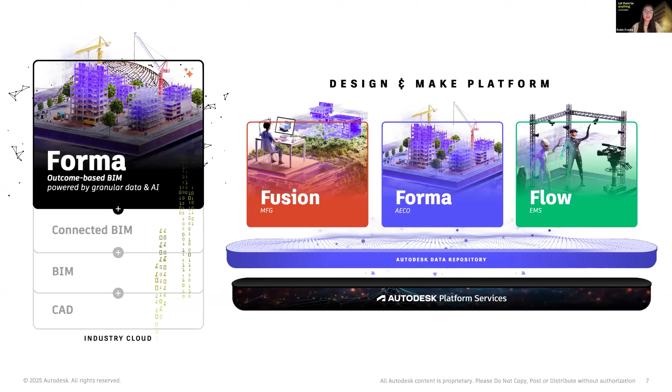So, as the poll showed, a lot of you haven't heard of Forma before or haven't used it. So let's just start with a little bit of background. So Forma is the AEC industry cloud for Autodesk. We have three industry clouds within the company, Forma, Fusion, and Flow. And Forma is the industry cloud for architecture, engineering, construction, and operations. And Forma is the first comprehensive industry cloud in the industry for architects, engineers, contractors, and owners.

It aims to unify BIM workflows across the project lifecycle and across different verticals as well. So it really is going to be a comprehensive industry cloud with one common data environment. So you'll be able to work across a project lifecycle in different stages and not have the need to do any rework. The data that you create in the beginning and the planning phase will be carried on all the way to operations with the Forma Industry Cloud, with new tools like Forma Site Design and Building Design built on top of the Industry Cloud.

And in the future, with the Industry Cloud capabilities, we'll be linking our hero desktop products like Revit with our connected clients to ensure that we're working on one common cohesive project environment with up-to-date data and one data source.

So just to talk a bit more about what this looks like, if we think about a project and its life cycle from planning to operations, we have multiple tools available at Autodesk to help support different parts of a project and its life cycle. The tool we're going to be focusing on today is Forma Site Design. And Forma Site Design is a cloud-based tool built on top of the industry cloud to support early stage planning and design for buildings. And that's what this meeting is about.

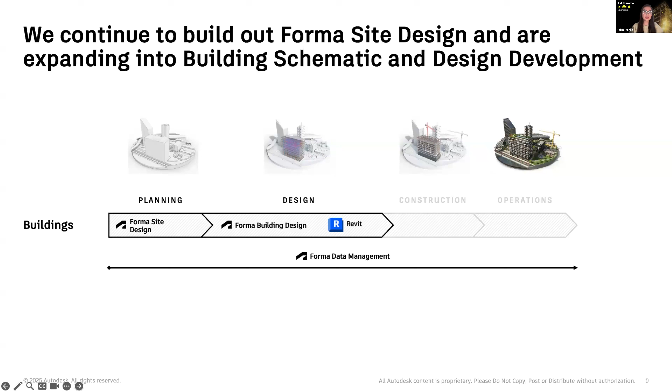All right, so more about site design. As we know, it's that tool in the early stages of a project that you would start a project with. What is site design? So site design is an early stage cloud-based analysis and conceptual design tool where you can do a lot of different things. So the beauty about site design is that because it's cloud-based, you don't need to have anything downloaded, right? So you can access it via Chrome and you can get started with a project in your location with just a couple of clicks.

So when you start a project for the first time, you're able to order contextual data that is available for the actual location of your project and get going on a site with data that's already geolocated and ready for you to start designing, which moves on to our 3D modeling capabilities. If you would like to, you can design natively in the Forma environment, both 2D and 3D assets that you can then run environmental analyses on.

So one of the main benefits of using site design as a tool for early stage planning and design for your massing studies is that you can run a suite of environmental analyses to help optimize and iterate based on outcomes that you are striving to achieve. So we have a variety of different analyses, sun hours, microclimate, wind, noise, embodied carbon, shadow, that are all native to the site design product that you can then run multiple times as you iterate on your massing options. And we'll see that more with HMC's presentation.

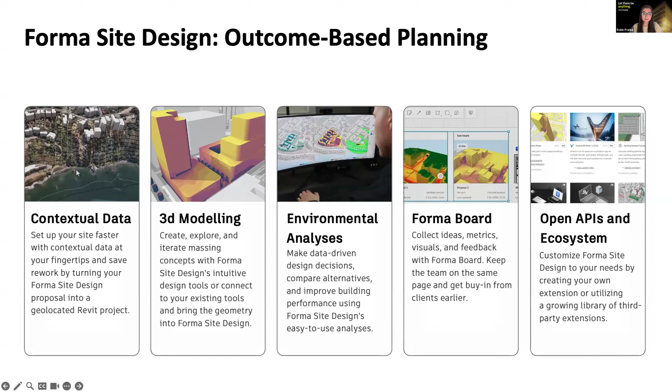All right, so here is a quick demo of site design, starting out with site creation. So going through the process of creating a project is very easy. All you do is enter the address of your site location. It's going to ask you to confirm the map area of your project. And once you click confirm, Forma will start to create a site for you. So it's generating the data for the site, including the terrain. And then it's going to ask if you want to order any contextual data for your site.

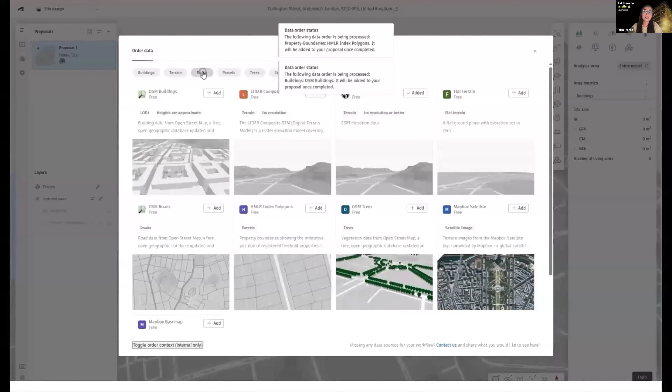And this is such an easy way to get started with a project. If you have no data available or don't know where to start, you're able to pull in existing conditions information directly into your site. So everything from buildings to property boundaries, to terrain, roads, trees, etc. You're able to order natively in Forma, and Forma will automatically georeference all of these contextual data sets for you and place them onto your terrain.

By the way, the terrain is also, of course, accurate for the area. And you are also able to toggle on and off your different data sets and choose some of these data sets, your contextual data, to make them your site limit. So here, if we wanted to take a property boundary that we ordered, we can select those and merge them to become our site limit for our project, which is wonderful.

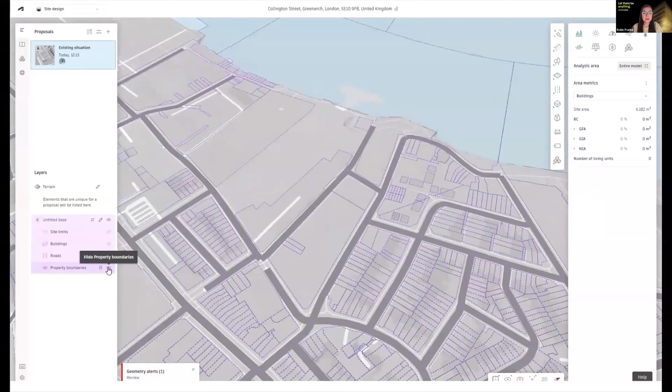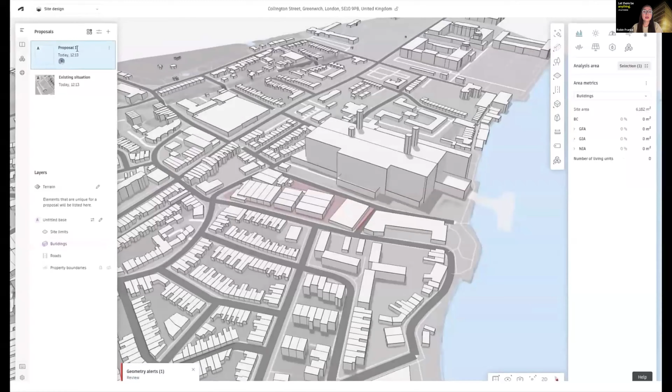So just in a couple of minutes, we're able to go from nothing to a pretty good starting base for our project. And this is especially great for pursuits, right? When you don't have a lot of time, but you want to have a good start of existing conditions to better understand the area of the proposed project. And see here, we've brought in the roads, we've brought in existing buildings, we've defined our site limit to go ahead and get started.

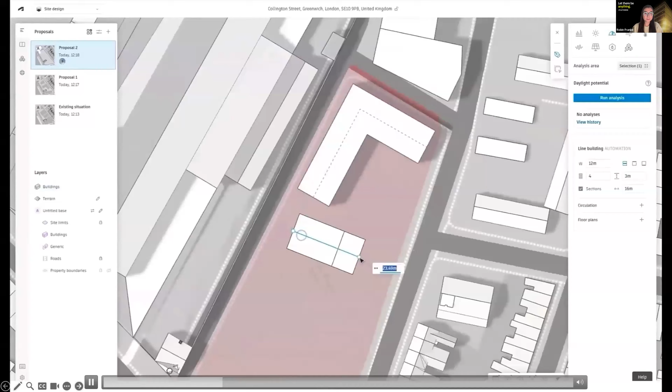So there's a series of tools that you can use within Forma to start designing. We have various building and massing tools that you can use that have different automations depending on the types of buildings that you would like to draw. This is our line building tool, so it will generate a building segment based on a line that you draw on your site. You can then choose to section it off, or do whatever you would like. It's a very easy way to start to generate area metrics based on proposed buildings just by drawing a line segment. So this is just one of the automations we have in drawing 3D for buildings to go ahead and get started and understand what's possible on your site.

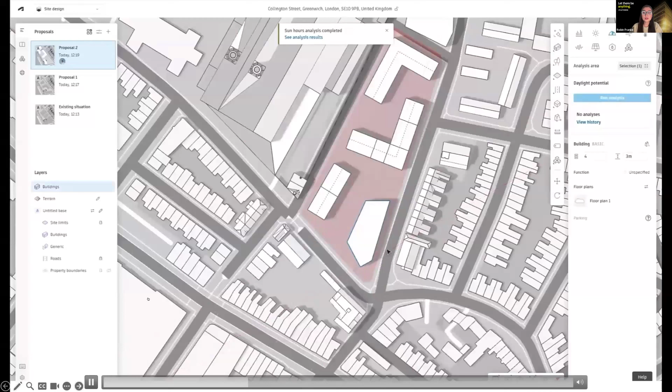We also have the ability to do some advanced drawing tools as well. So we have a basic building tool, which allows you to generate your own building footprint and extrude that by height. So that's another building automation. And for more advanced drawing tools, we have the ability to enter a mode called 3D Sketch. So this is showing 3D Sketch where we're taking our line building generator and applying advanced conceptual edits to it. So by adding a pitched roof to this building using 3D Sketch, we're able to get a little bit more detailed in our massings.

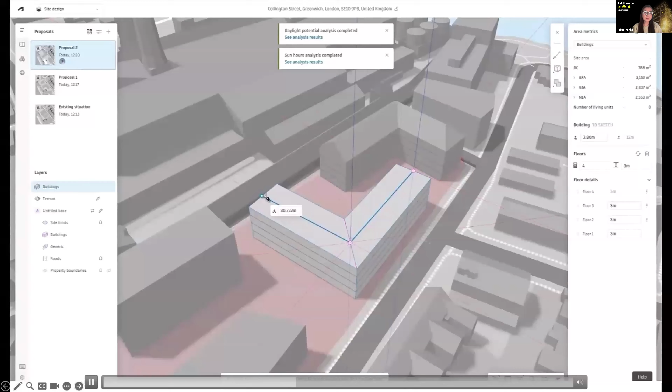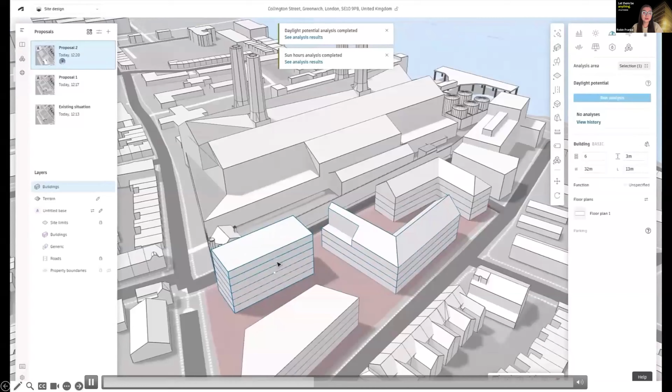So just to recap, we have a couple of different building tools in Forma depending on the level of detail you want to get into. If you just want to draw out massing options very quickly, massing blocks to understand potential area capacity, you can use a line building tool. We have a basic building tool for drawing out building footprints and extruding that by height. So those are both LOD1 options. And then we have a tool called 3D Sketch, which is what's shown here, to advance and further detail our masses to be a bit more conceptual as well. So depending on the level of detail you want to get into Forma, you're able to do so natively with our drawing tools.

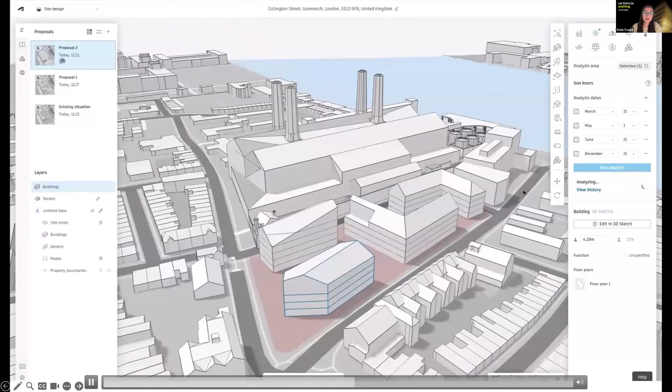All right, so notice how we've been running some analyses. On the right-hand panel are the analysis tools that are available natively within Forma. So we have a sun hours analysis that we've just run, daylight, wind, microclimate, noise, solar panel potential, and embodied carbon. All of these are meant to be run on your different massing options that you have in site design and start to understand, iterate which design is performing better.

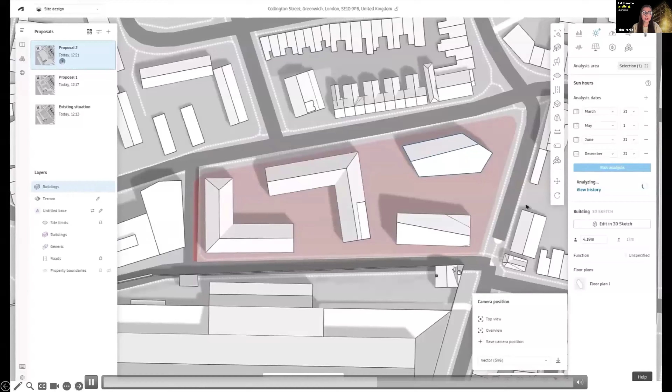And depending on what the outcome is that you're trying to achieve with this project, you can make better and more informed decisions on which design option you should move forward with. And that's really what the goal of site design is for. It's to give you these insights that you may not have been able to run with other tools at this early stage when it's still possible to edit and iterate your mass before it's too late and it becomes too expensive to do so.

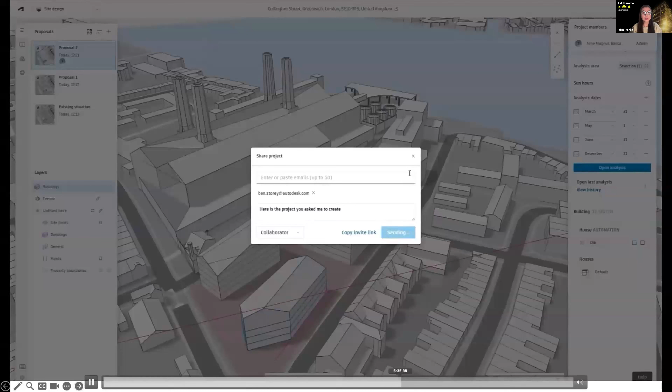We can also share the sites with stakeholders and our teammates. So you can share the project not only with your teammates to edit with you and collaborate together in the site, but you can also share the project or the site as a viewer. So if you want a stakeholder to view the environment and your proposal in 3D, that's also an option.

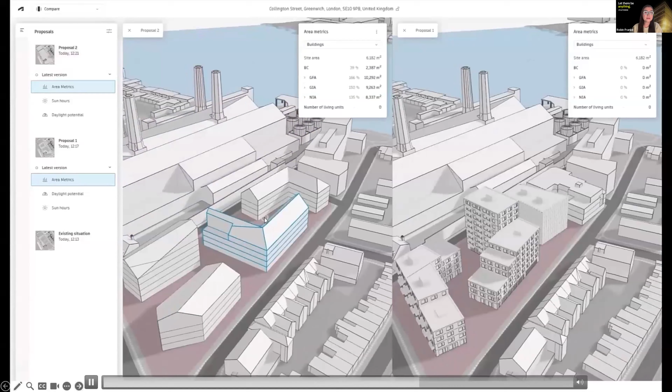So now we're moving into a mode called Visual Compare, and this allows us to view our analyses and our design options side by side for the same analysis. So let's say in this example, we have two synced camera views of two different design options with the same analysis being run. And we can see one design option and the other and how they perform against each other.

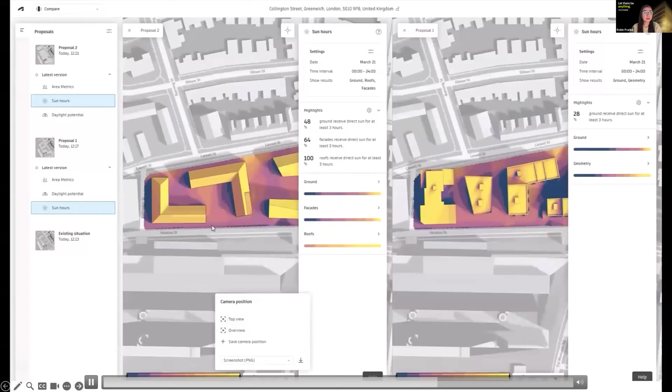Maybe the one on the left is better for sun exposure on the facades versus the one on the right, but maybe the one on the right performs better for wind conditions in the area. And it gives the designer more information to analyze these trade-offs, to understand what they can expect for these projects before we even go into detailed design, to understand what it would be like to experience this project on the ground and to be someone who's going through the project and living there.

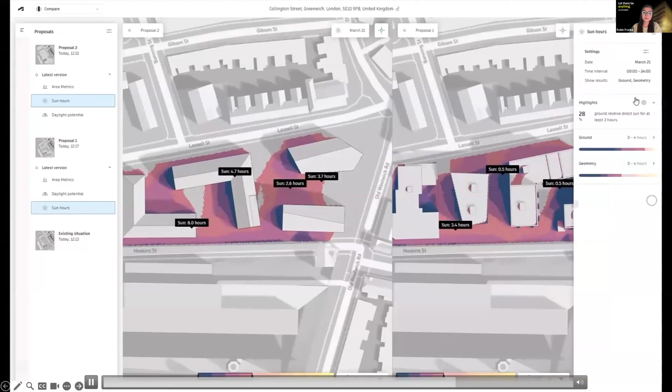So this is just showing the capabilities we have for exploring our analyses and the detailed information we can get. We can add in inspection points, which will show us directly on the site or the facade what the result of that analysis is. So sun hours is telling us the number of hours of sun over a period of 24 hours on a given day.

And then lastly, talking about Forma's collaboration tools, we have Forma Board. So Forma Board is directly linked to site design, and you're able to create frames, look at your proposals or your design options on the left, and then drag and drop the widgets for your area metrics, the analysis that you run, and place them in a visual whiteboard for stakeholders and team members to collaborate and comment on, which is really fantastic. So here we can see we're dragging in the live area metrics, the live design view, and some of the analyses that have been run.

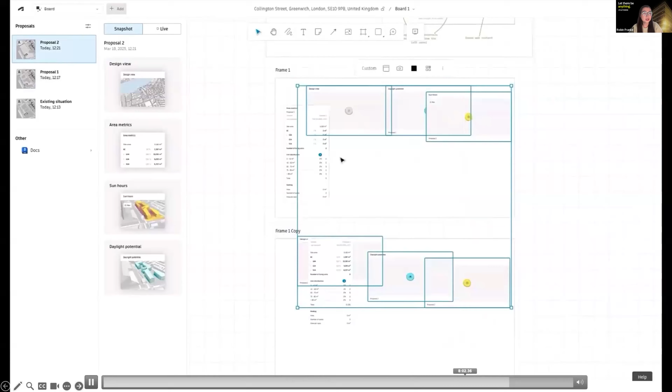So two design options, the same analyses, as well as the area metrics. And we're able to showcase them in a nice, clean presentation view, snapshot view, to understand the trade-offs between each design.

So here you can invite people to comment, just like you could invite people to the site, you can invite people to the board to comment or to edit, to collaborate with you and to get more insight. So it becomes a live project sharing tool, but it's within site design, which is very nice. So you don't have to use another application to do this work anymore.

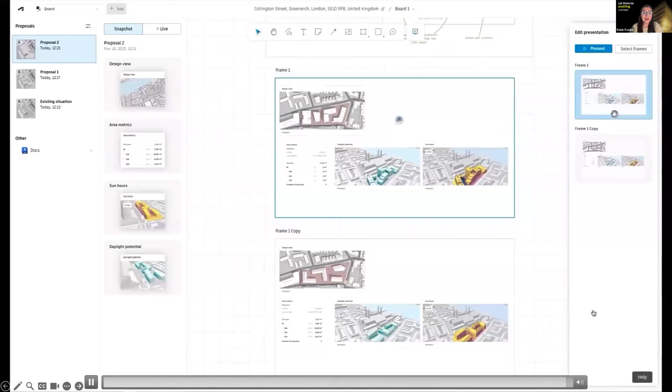And then lastly, we also have the ability to enter presentation mode. So if you would like to, you can use site design and Forma Board as a presentation tool to wrap up all of the work that you've done within site design for early stage.

All right, so just to recap, Forma Site Design is a tool for early stage planning and design. When you're just starting out on a project, if you're working on a pursuit, site design is a wonderful tool just to start and understand what the existing conditions look like and what you can possibly propose on a site without having any data to go off of. Forma provides that great basis of understanding for you.

And really, there are a lot of ways you can get value from site design. We'll hear from HMC, not only with increased productivity, but better project outcomes with the outcome-based design workflows that Forma provides. The ability to iterate, see an analysis result, iterate to try and improve the result over time will lead to better project outcomes. And of course, with Forma Board and the ability to share in a cloud-based environment, Forma is a wonderful tool for improving collaboration, not only with your team, but other stakeholders as well.

All right, so that is a brief overview of site design. I wanted to give you the opportunity to log in to site design now if you wanted to see what it looks like. If you go to app.autodeskforma.com, it will ask you to log in with your Autodesk credentials. Many of you already have access to site design as it's part of the AEC collection. So it doesn't hurt to log in and explore and see what's possible with site design. As you saw, it's a fairly easy tool to use and you can get a lot of value from it.

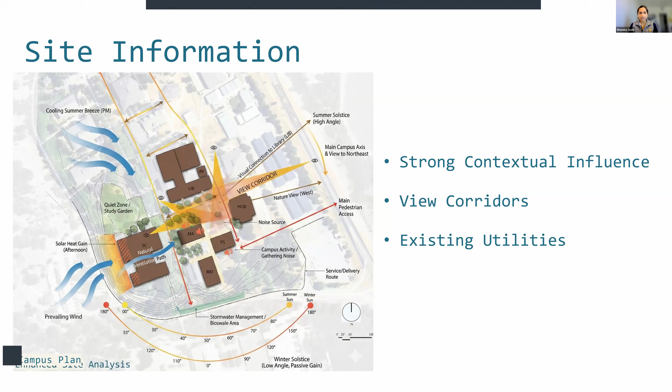And to understand the local climate and context, we researched the psychrometric chart. And with the data, we realized that this was a very heating dominated climate, and we have a huge opportunity for some passive efficiencies to gain here. Specifically, you can see that sun shading and internal heat gain is almost 40% of the time, and heating and humidification is at 40%. So what it means is these are the significant number of hours needed for this building to feel cool and comfortable.

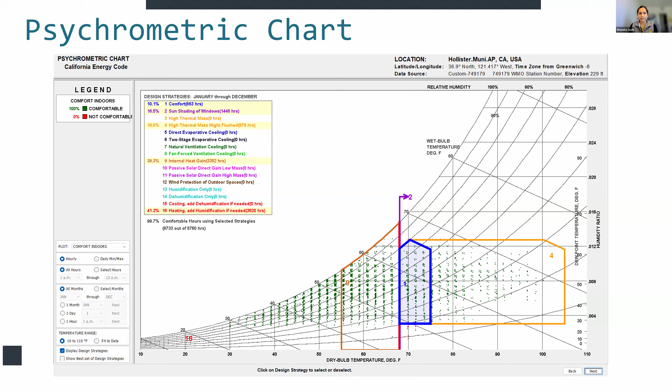And this validated some of our decisions to prioritize southern exposure and having facades with longer depths and general orientation strategies very early on in that pursuit stage.

We also wanted to make sure that we aren't designing in a vacuum. So we sat down with the users to dive deep into the program adjacencies. By moving physical pieces around on a site map together, we uncovered some connections that we had missed on the screen. For example, during this session, we learned that that existing redwood tree was important to them.

And this session really defined the flow that you see on the left, ensuring that the new science center was not just efficient, but it was also supporting the campus culture that they valued the most. So from this entire session, we defined our key variables.

So based on the site analysis and user interviews, we established these 5 control variables that we can run tests on throughout our process. So we needed a massing that fits the program, but also actively optimizes for solar exposure. And we wanted to avoid any unwanted wind tunnels.

And we wanted to shield classrooms from outdoor noises because there are some existing HVAC utilities out in the courtyards that were generating a lot of noise. So opening up any of the courtyards there would render them pretty much inefficient. And eventually we added these 2 additional parameters of possibility of saving the tree and also making sure that we incorporate user feedback throughout this entire process.

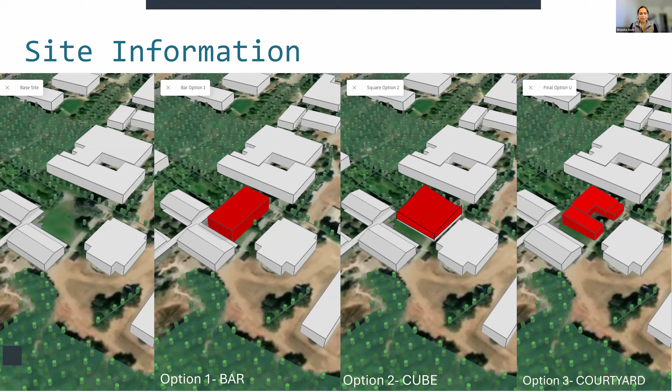And that allowed us to prove that while bar was what they had asked for, what they really needed was the courtyard option, and we'll go through that. And that offered much superior daylight and outdoor comfort that the bar option just couldn't match. And with this process, we had established the how of our project, and the data defined most of our strategy.

And now Venus will take you under the hood to show you the engine behind those decisions and demonstrate exactly how we ran those simulations in Forma. So take it away, Venus.

Just let me swap. Can you see my screen?

Okay, thank you, Shweta, for overviewing our pursuit projects. Let's move into sustainability. In the following slides, I'm going to show the analysis that shapes our design. Instead of jumping to the outcome, we want to walk you through the process. It is important to see the data behind the design, not just the final model. In this case, we selected.

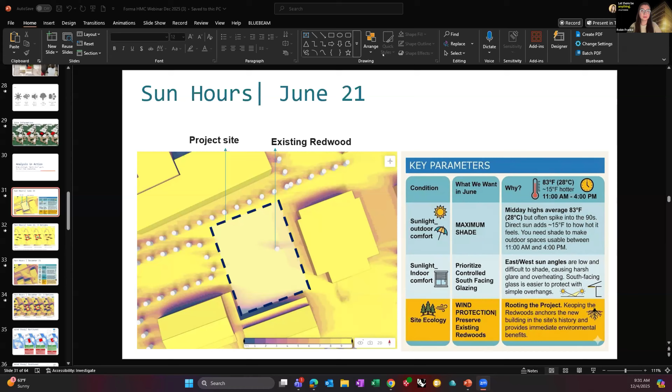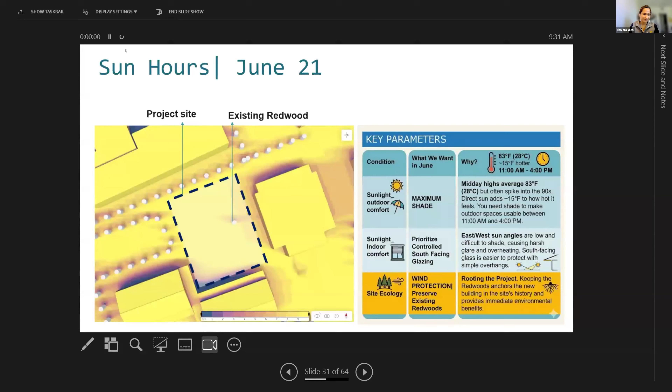Venus, hold on a second, I can't see your screen. Oh, you cannot see my screen? Just let me see. Okay. Okay. You can see my screen now? Yes, but not in presentation mode. But I can see the PowerPoint. Okay, just let me try one more time. Let me share again. Okay, share it. Can you see now? Perfect. Yeah, there we go. Okay, great. So let's go. Thank you, Shweta. Do you want to start again?

So let's jump to sustainability. In the following slides, I'm going to show you the analysis behind our design. Instead of only focusing on outcomes, we would like to walk you through the process. It is important for us to show the data behind our design, the science behind our design, instead of only focusing on a final model. We selected some key studies to share with you. It's not all of the studies that we had done for these projects.

Let's start with sun hours in summer solstice. So as you can see, the first step for us was creating a key parameters table to ensure all of our teams were aligned in our goals. For example, in this case, our goal for summertime was maximum shading for outdoor comfort, and also we aim to reduce the harsh sunlight in the east, west, and somehow in the south.

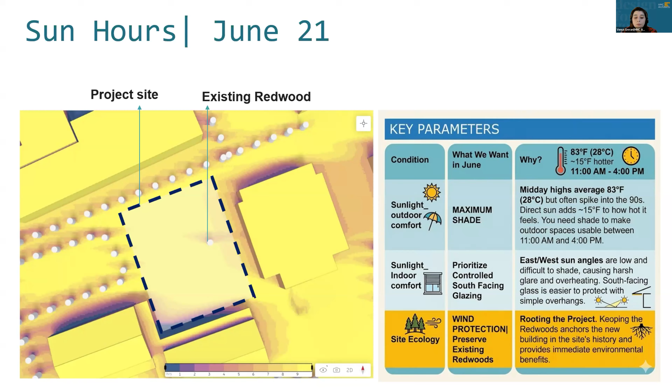And as Shweta mentioned, there are existing redwood trees on our site, and we are looking to keep these trees as one of our site ecology goals.

So I wanted to highlight our methodology here. For a comparison between the options, which are bar, cube, and courtyard, we placed some critical location points on the site, and using great tools in Forma, helped measure exactly how many hours of sun each area actually receives on June 21st. And then we take an average in order to compare the data.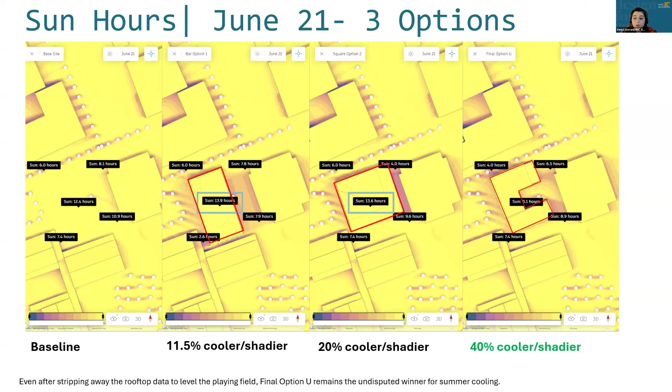As you can see, we have some locations on the roofs too. To ensure we have a fair comparison, we take out the rooftop data and then make an average again. And the result actually showed us the courtyard option was the most effective for shading, both with and without the rooftop data.

So in the next slide, I'm going to go over winter solstice, and we use the same methodology, but different criteria. We still have our key point table, but in winter, our goals flip. We want maximum sun exposure during winter time to create warm sun pockets and capture as much passive gain as we can. It actually helps us reduce the building heat loads during winter time. And let's go to the comparison between the options that we have.

If you look at the result, you will notice sun hours drop significantly on the courtyard, around 43%. Even when we take out the rooftop data, the courtyard still shows the least amount of sun. But we need to consider this analysis only reflects the sun study. And it's important to note in winter time, we actually have significant wind as well. So we need to review the wind study for that time, our critical time, which is the winter, as well.

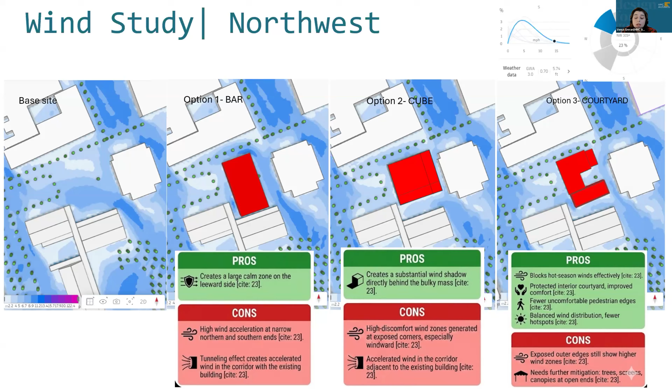But the courtyard option shows it controls it effectively, not only around the building, but we actually create a calm, protected place in the courtyard as well. So that is another benefit that we found for this option.

But on the courtyard, you can see it's the best. We still have the wind tunnel, but it's better than the other options. And we still have a calm environment inside of the courtyard.

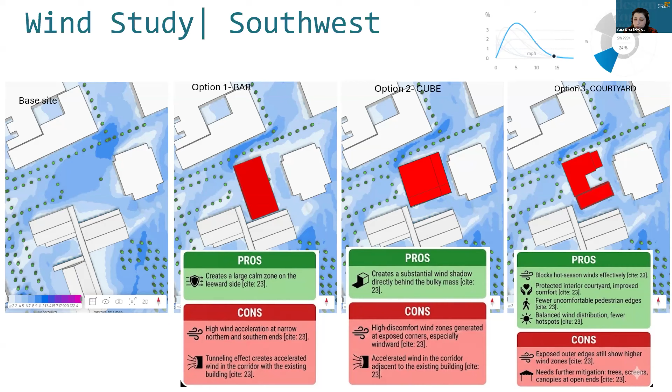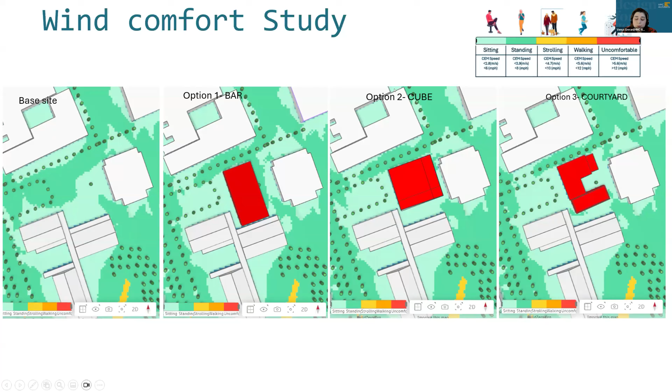So now it's time to combine sun and wind into a single microclimate study. I think Forma has done a great job adding this feature because it allows us to interact with both sun study and wind at the same time. I think it's one of the great features they added to Forma.

So let's revisit all key parameters as one of the key points of our methodology, and it helped us keep our team completely aligned. Let me show you. Okay, so let's review the summer, and just review our parameters.

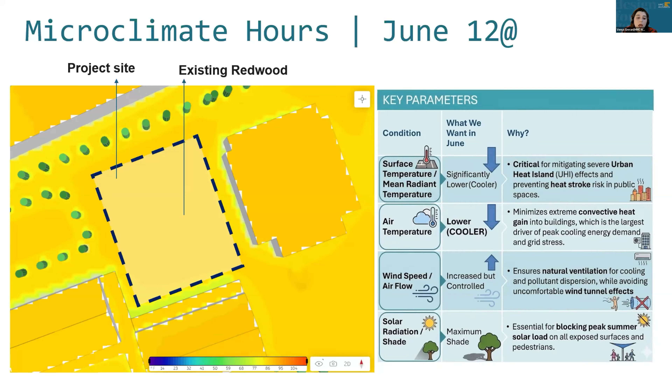So in summertime, as we talked about before, we want lower temperature and lower surface temperature to prevent heat stress. We also want a good amount of wind, but we want to control it as well. And shading is one critical point as well. Let's analyze the results that we ran.

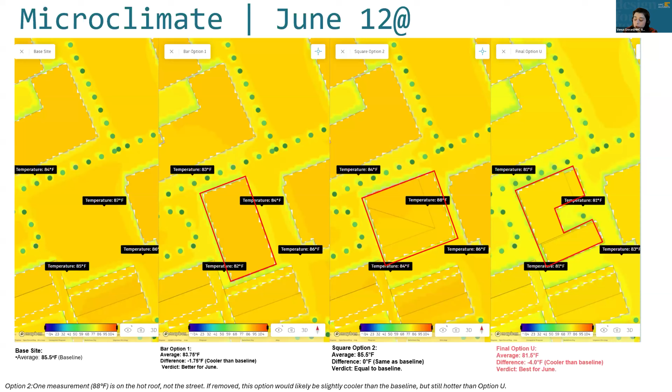Again, we used the same methodology as before. We chose specific locations on the site and used Forma to calculate the temperature at those points, then averaged and compared the results. In this case, we found that in June, on the summer solstice, the courtyard option works the best. And let's go over the winter solstice as well.

So in the winter, we use the same methodology. We have the key parameters table with different criteria. We want higher surface temperature and higher air temperature as well. We want to reduce or block wind, and we want maximum sun exposure. Let's overview the results and see which option works better.

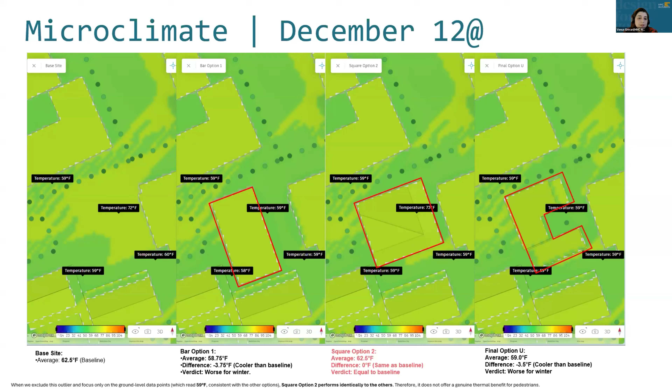Let's go to another study. I think this is the coolest study in Forma, which is the noise study. As Shweta mentioned, on our site we have two existing HVAC systems. And because these are educational buildings, it's important to know the noise that these two HVAC systems produce.

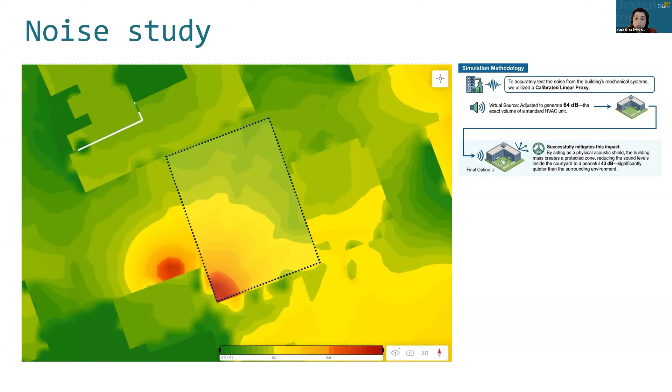To simulate the actual mechanical noise, we used a creative approach. In this case, we defined a specific road, adjusting annual traffic and a speed number to produce exactly 64 decibel noise in Forma. Thanks, Forma, about that. We created this road as a calibrated linear proxy to work as our HVAC system, and it helped us to see the effect of the noise produced from this existing HVAC.

So let's go over the results from this noise study and this method. You can see the courtyard has the best function compared to the other options, which are bar and cube, but we still have the problem on the west side. So our team decided, in order to solve this problem, to place all service rooms, like mechanical rooms and bathrooms, along this wall to serve as a sound barrier between the HVAC system and our classroom. So it makes our classroom very quiet.

Let's go to the last study, which is the solar study. We live in California, and since the building code requires us to install solar panels, it's important for us to know the total solar energy produced by PV panels if we install them on the roof. So Forma gives us the opportunity to calculate it very easily in the early design, and see whether we are going to meet the code or not.

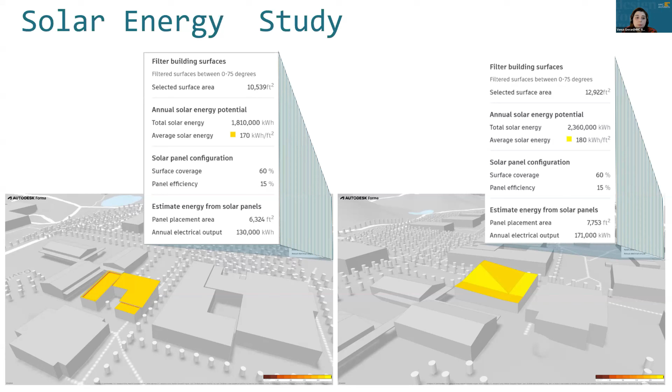We calculated the total solar energy for both of our options, which are courtyard and cube, and both of them show we are going to meet code compliance, which is great. And now I'm going to go over our Forma board.

So we use the Forma board as a central collaboration hub. We call it a central collaboration hub because it allows all of our teams to see all of the results instantly and also track improvement, and all of us share every design iteration and meet the project's requirements, and in the end it helps us keep everyone aligned, which is critical for pursuit projects. We have a short time to gather data and make a decision.

So I'm going to pass the presentation to Ashwata. She's going to summarize our results and show the process that we went through from data to decision. Thank you, Venus.

Right. So, like Venus mentioned, doing analysis in Forma provided us a lot of helpful visuals along with data. And this was a group of scientists and researchers who really dig data. But having a visual along with the data really helped get buy-in super quickly and also gain their confidence early on. So analyzing those three options, we created this very simplified chart to compare apples to apples.

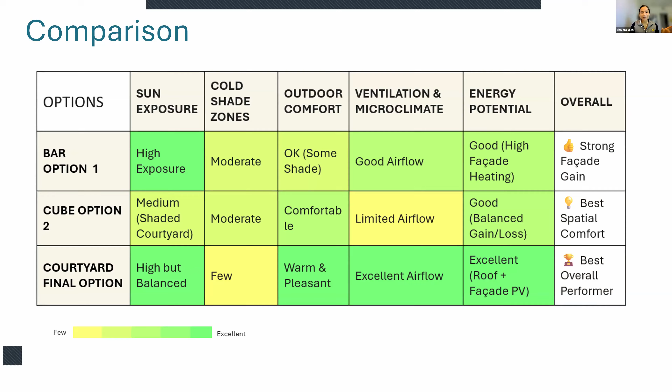And with that comparison, we realized that the courtyard option, even though it wasn't perfect, was checking off a lot of the boxes in each category. Of those initial five key parameters that we had set, it was winning in most of them. And so for us, it isn't about choosing the best one, but really understanding what my trade-offs are of choosing this versus the other option.

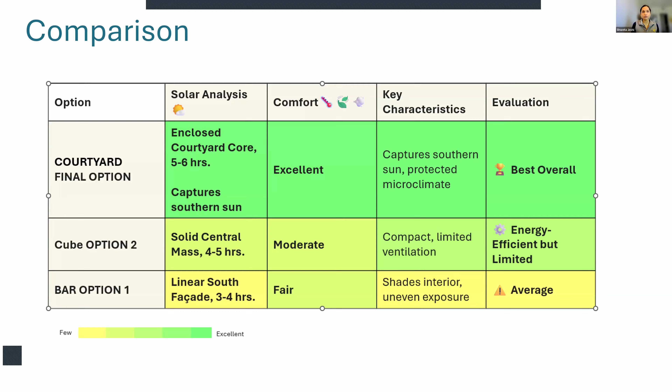And that was really the key thing we took away from doing all this analysis in Forma, really distilling it down to what's essential to the user and whether we are providing that or not. So in my opinion, that was the best thing that could happen. And also because all of this analysis takes a fraction of the time that we used in the past, it's a great tool for us to supercharge our analysis.

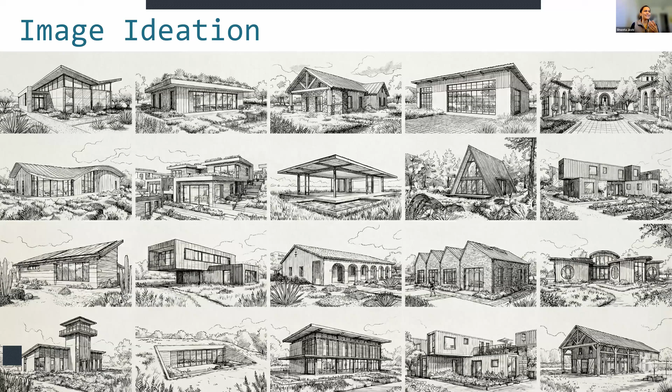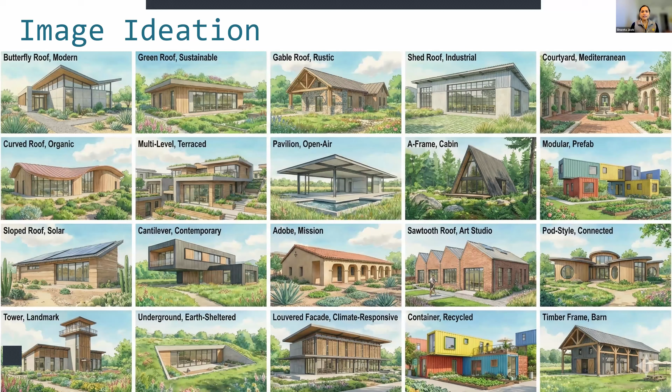And so for the next phase, we focused on rapid visualization, because once we had that courtyard typology settled, we were casting a wide range of vocabulary, like what's possible out there. And we started with some ridiculous options. This was for us to fail fast so we can succeed quickly, and discard all the bad ideas from this prototyping. And the best thing was that we didn't have to model every single one of them. We could quickly visualize, zoom in and out fast enough, and model just the things that are necessary.

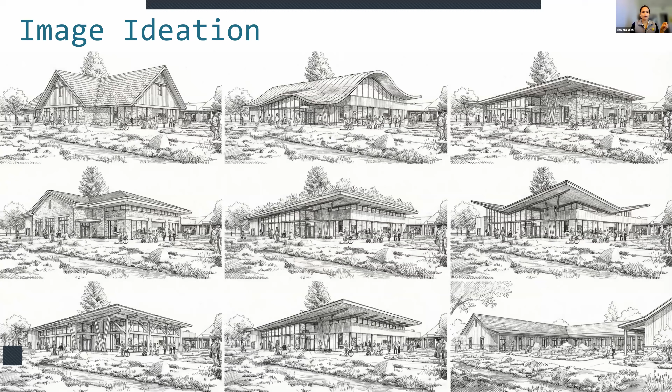So from that very early stage where we were looking at hundreds of options, we filtered it down to what would really work for our climate and our typology. Then we filtered a few ideas from that, and we were trying to look at what's the aesthetic we are after, and what are the touchy-feely things that they would care about. And to do that, we also explored the emotional aspect of the spaces.

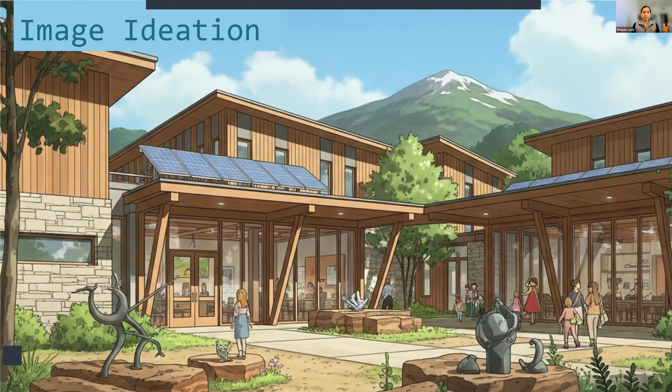But then, as a final output, we were asked to create this 11 by 17. So we didn't want it to lean too much into this very hyper realistic image because then it kind of puts you in a corner. So instead, we kept it loose in a sketch-like style where it was open to interpretations and open to adaptability in the future. And I felt like that worked much better instead of us showing a very polished final image.

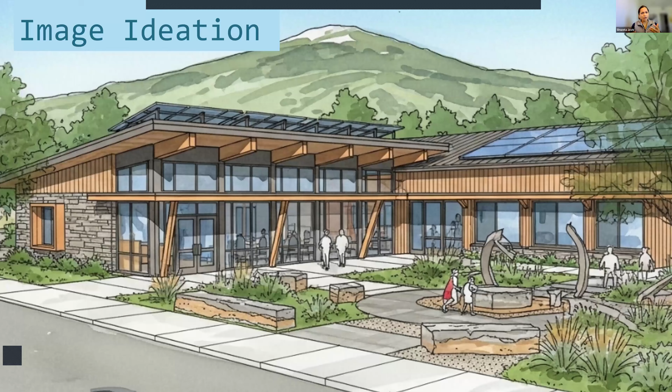So this was also a series. We had done a series of iterations, and these are a few examples from that that really worked for us, where we were asking them, does this courtyard space feel large enough? And is it incorporating that indoor-outdoor connection seamlessly, or is it incorporating those ideas of science on display the way you had thought about?

And this was more or less closest to the final result that we had shared, where we were also adding those atmospheric aspects to the project, and also making sure that we populate the scene with people and nature to visualize that design for good ethos that we have at HMC and showing a vibrant, sustainable ecosystem. And we had also done a couple of walkthroughs, and that's also really great with all the new tools we have available in AI visualization.

So in conclusion, I would like to say that this was a very efficient process for a project pursuit, because there we have very limited time and resources. So we want to make sure that the tools that we have, we are using them very efficiently. And you may ask why go through all this trouble, right? And in one word, I would say confidence. It really gives you confidence in your sustainability goals because you test them early on.

And it gives you confidence in your form because you are able to rapidly iterate and rule out all the bad ideas quickly. The client had confidence because our visualizations were clear and our data was compelling, and they were able to really understand, analyze, and also synthesize in their mind too. So I feel like this workflow turned very subjective opinions into very data-driven decision making, giving us the peace of mind that we are designing the right project for the right site.

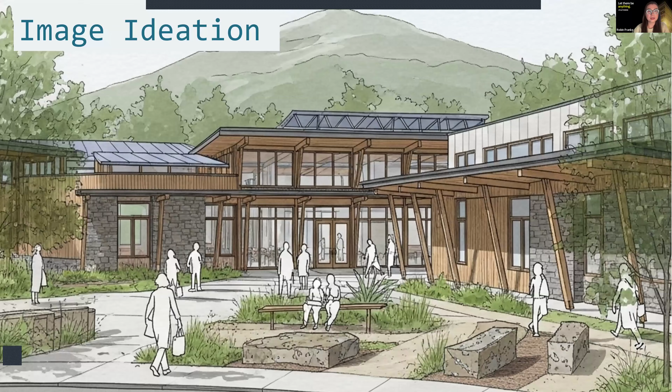While you're finding that, there's a question on parking analysis. Is it integrated in Forma? There's a surface parking analysis add-in with TestFit, and you can add the TestFit extension to your site and use that to generate number of spots given the geometry of your surface parking area.

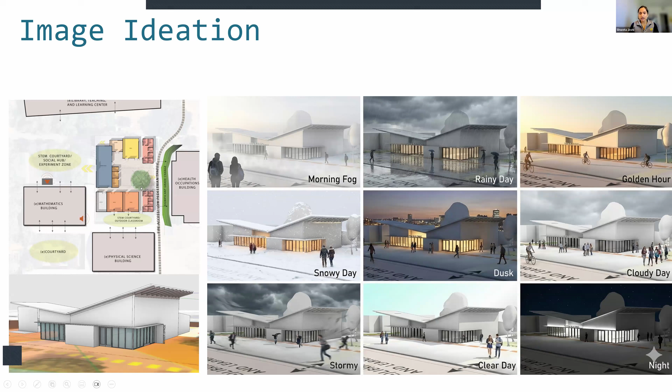So this was the feeder. We had started with a very basic extruded massing, and we were working off of that to generate a series of iterations, because we had few things very clear, like the maker space needs a lot of northeast exposure. We had all the program adjacencies that you see in this floor plan. So what benefited us is we didn't have to model every single one of the options, and we could still visualize all of these iterations without detailing every single beam.

And remember, of course, our final design was still done by a visualization expert, which was very different than what I'm showing here. But this was for us to really explore all the ideas before we move to that very final modeling of that refined design.

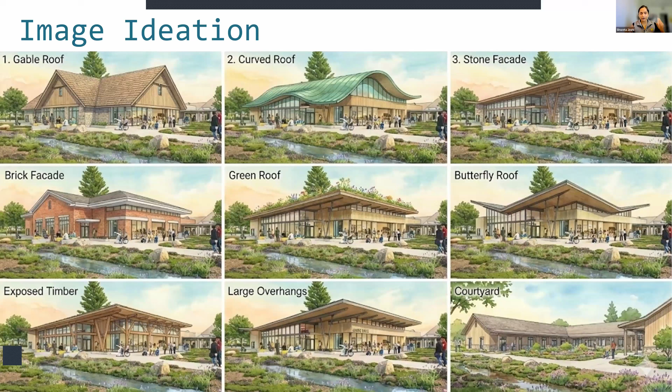Amazing. It's really interesting to see the suite of tools that you used and the workflow between different tools, how Forma fits in the early part, how you can go into Rhino to further detail out the mass, and then bring that into tools like Gemini to help with the renderings. And we are actually getting the capability in Forma board to generate with Gemini from screenshots. That wasn't available for this project, but our team is working on it, so it's coming soon to Forma board, which is really exciting.